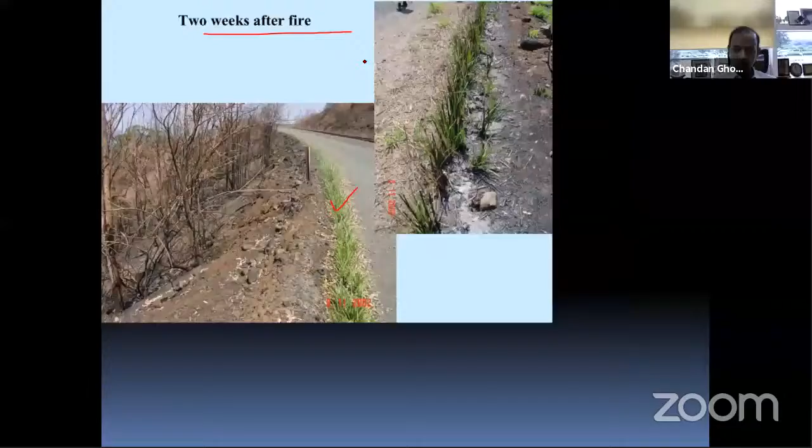And then they started growing, after a week, after 2 weeks. After 2 weeks, it has got the greenery. What a wonderful nature's gift, that when it is burning everything, the roots that you have seen, they survive. Of course the heat cannot go below.

So they start again, they survive not on any water that you have to sprinkle. The root has got enough moisture, and they have got many other qualities. They start growing and greening.

So when our fire officers or forest buffer guidelines that we have been looking for were given in the British era, and right now also we do not have any definition, we must relook into nature's gift that is available in the country itself.

So we can make our lakes and other things green also. This is the grass root that also cleans the sludge here in the toilet, in the village area, that when it goes through these roots, the groundwater gets clean. The leachate is being consumed through the root, and they survive on this through phyto remediation.

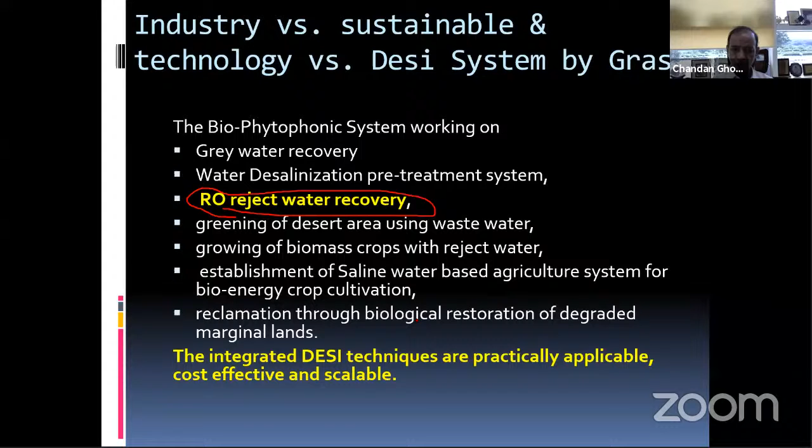So there are many other things. RO reject water also can be treated by this root. There are many other applications: wastewater treatment in industries, chemical industrial sewerage, number of examples are there, and service water processing also can be done.

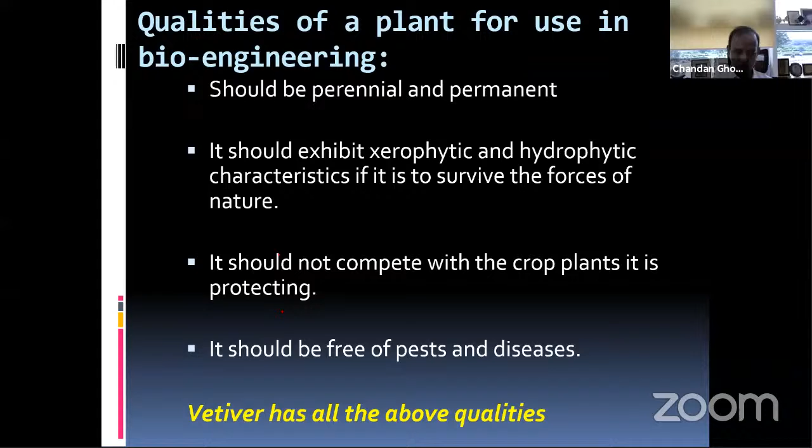So whatever has all this quality, it is perennial and permanent, and it should exhibit xerophytic and hydrophytic characteristics, and it should be free from pest. There is no pest attack on this.

Traditional medicine also uses this, and we use it in desert coolers. These days we have got many other substitutes for that. Now geotextiles are being used, and dried roots for scenting clothes is also being used.

And in this industrial waste, I'll go quickly: industrial waste you can see which is being impounded here by vetiver grass. And it is of course not in our country, this example is from another country.

Guangzhou in China, in 1985, vetiver grass was planted over here, and you see how green they become, because leachates come here and are taken up by this root while growing. When you check the leachate coming over here, it is completely free from toxic ingredients.

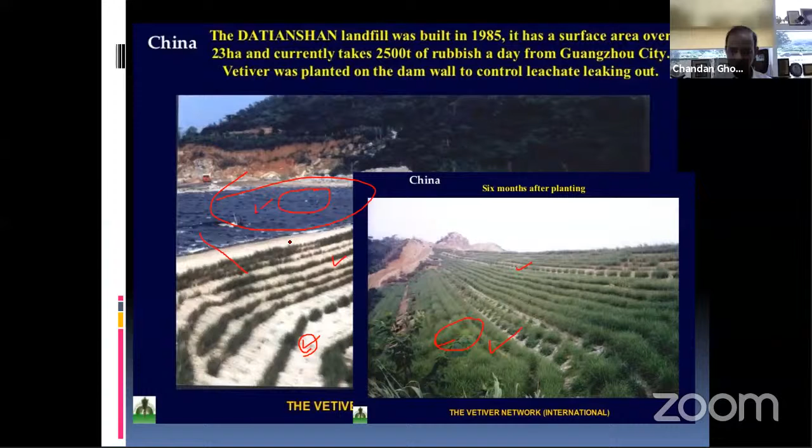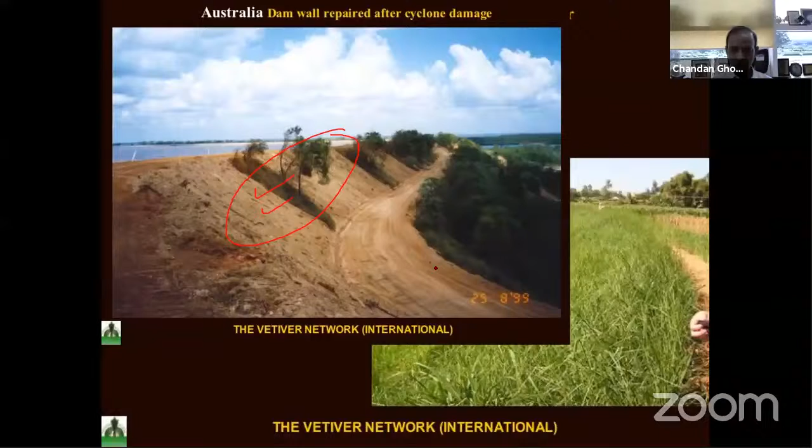So industrial effluent and this kind of thing also can be treated, or where we make embankments, even our roads, they can be made just like this, no concrete riprap or anything, simply by the grass.

It is a lifetime solution that is being achieved, in the hill area, if you want to live with the hill and the kind of landslides we are creating by making 2-laning, 3-laning, 4-laning, and we cannot all afford to have tunnels and other things. Even those need a lot of maintenance.

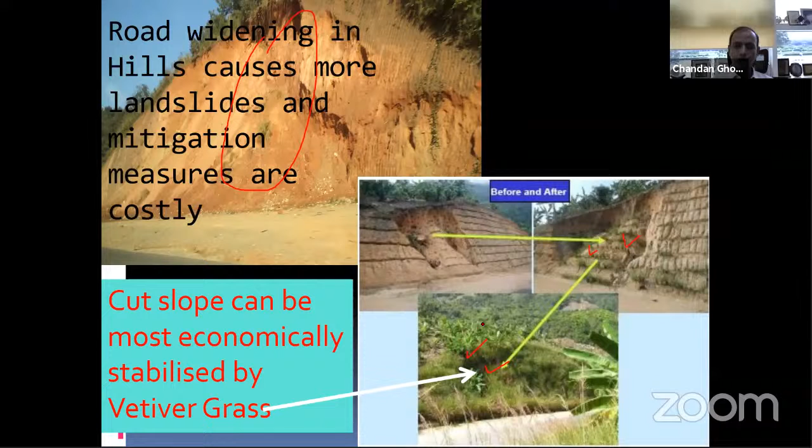But simply by placing the vetiver grass over here, they can ensure stability. This is not only one example; there are millions of examples that have redefined our way of living with landslides in the hill area. Like this one in Guwahati, you see without a landslide how it is happening.

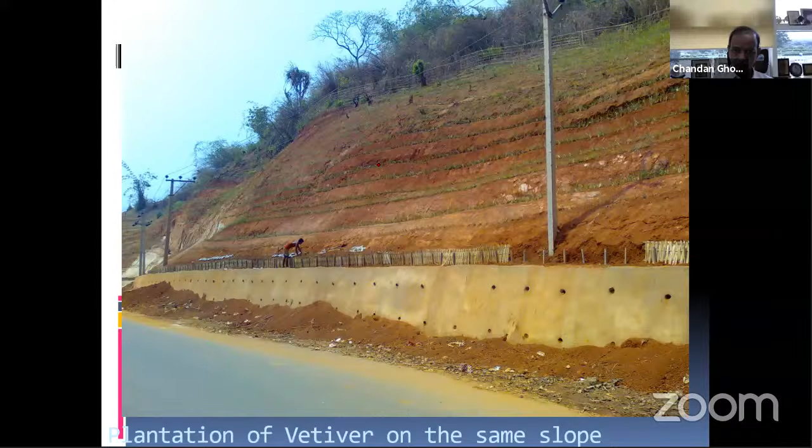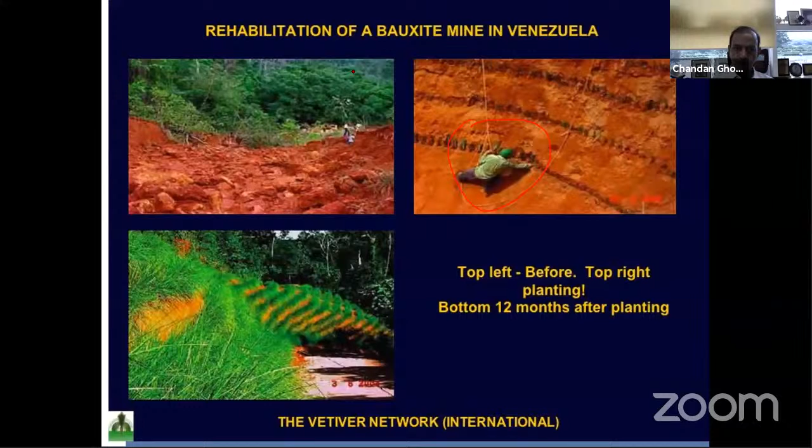And then with vetiver grass, in a few months of time, see how they have grown over here. You see the before and after. And also, any kind of soil they can grow in. Just a dressing has been made and vetiver has grown.

So we can even store water using this flexible membrane. I would like to say we can store water, because another problem is having drinking water in the hilly area. So we can use the geomembrane here, which civil engineers are familiar with.

This is a third wonder material that our industry has ever created after cement and steel. The geomembrane is being used, whether it is this chair or anything, or a computer outside box, and everything made of geosynthetics or polymer or byproducts. And they are being used as a membrane.

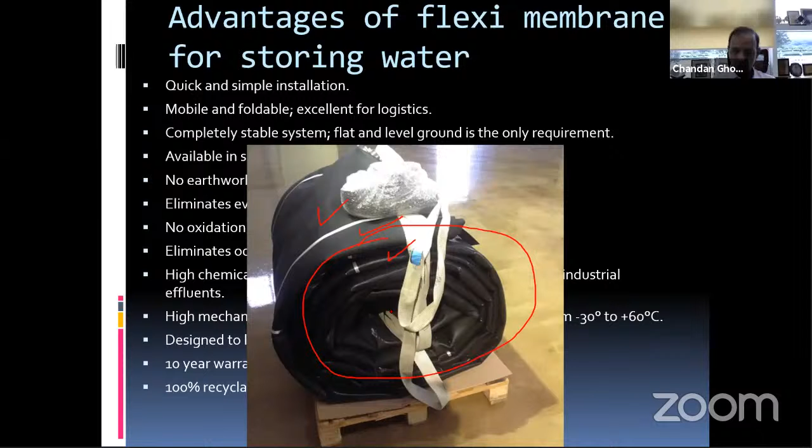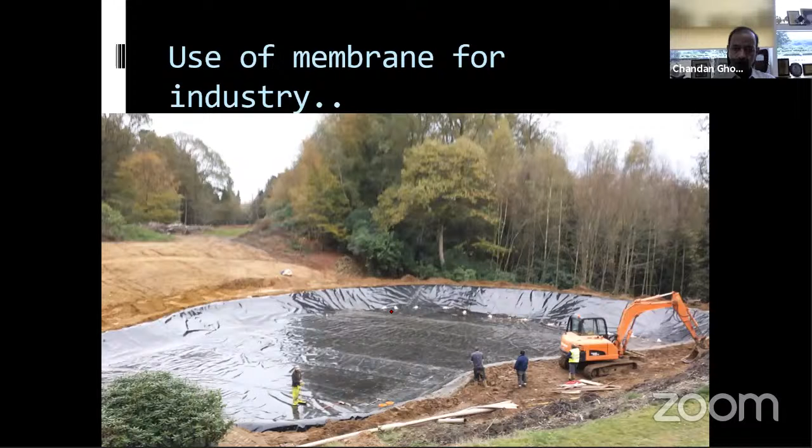We are now using these things as a substitute for even storing water instead of a dam, because dams have become controversial. We cannot have dams anymore because of environmental and many other issues. But these are used as a substitute to store water in hilly areas, hilly terrain. So even in hilly areas, we can store water in this manner, or this way also. These are some applications of geomembrane or ponds that we can make.

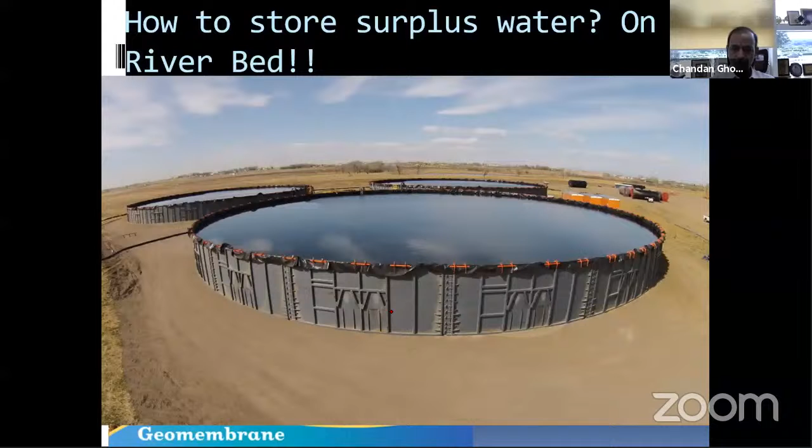There are many such applications in hilly areas that can help us live happily. If water is there, landslides can be tamed, and life can be easier. Or even canal lining, something like this can be done. So I would like to end here.

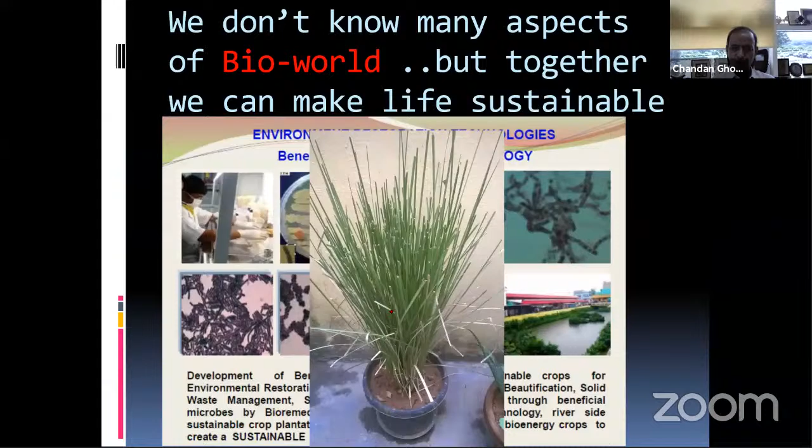This is being grown in my home. And there are many other applications of geosynthetic products to stop water from entering into our own area. So these are all geosynthetics, different products that can stop water entering and can soak up water.

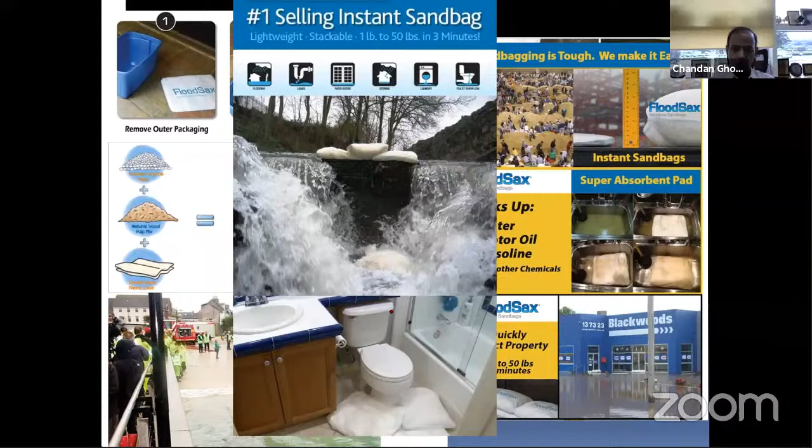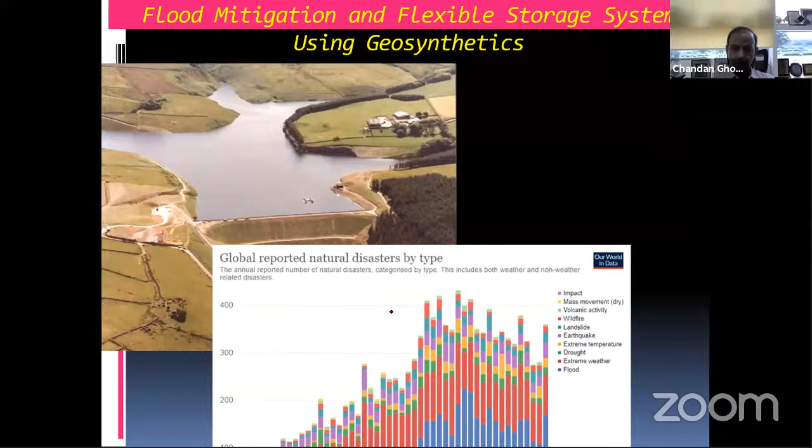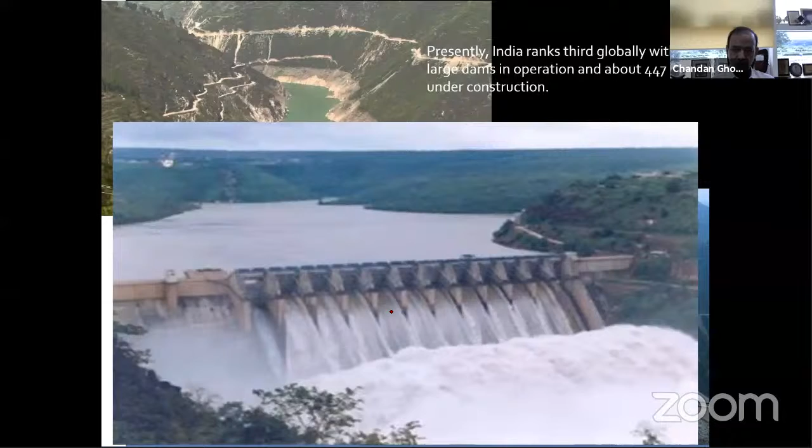If we live like here in Shillong, or in Aizawl, or other such areas, then we cannot make our hills truly resilient without addressing storage. As I said, or like the Tehri Dam that we are building, we need to find some substitute, because we can no longer make dams now.

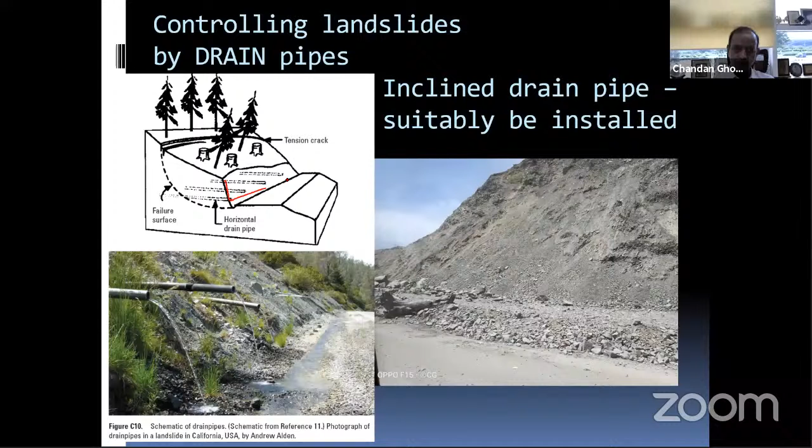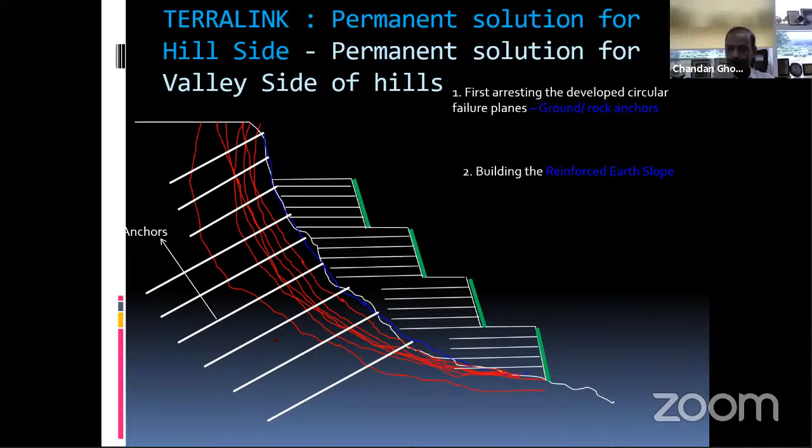Even stemming hills like this with horizontal inclined pipelines, as shown here, can make our hills safer from landslides. Otherwise, if we go for such kind of treatment, yes, it needs a heavy amount of investment. This is, you can say, hill surgery.

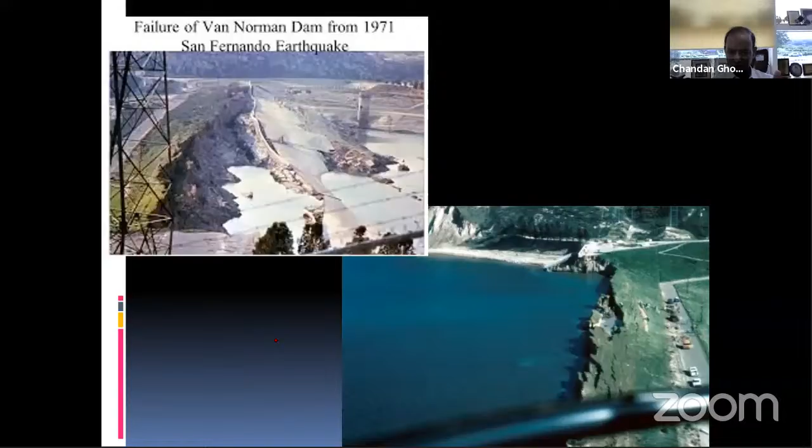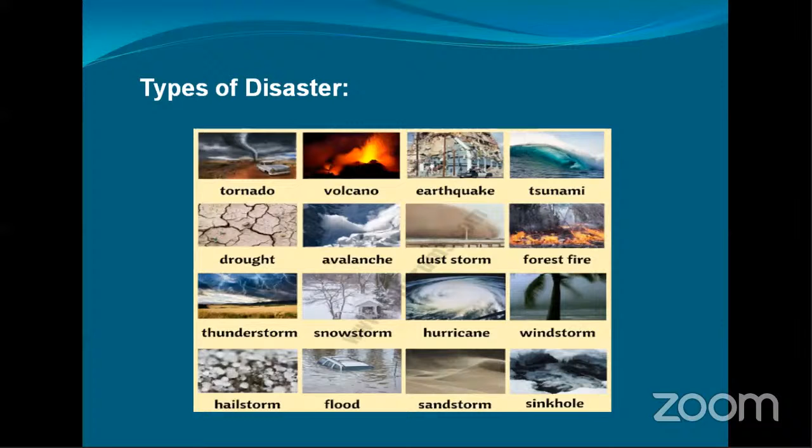Earlier, these events used to occur very rarely. But as the climate is changing, the frequency of these events has accelerated a lot.

So this slide is about climate change and disaster. I would like to give a brief linkage between climate change and disaster.

We all are aware of the Intergovernmental Panel on Climate Change. Recently, they gave their sixth assessment report, in which they warned us that the target of 1.5 degrees centigrade rise in temperature, which was to be completed by the end of the 21st century, will now be occurring by 2040, which is an alarming situation. If we talk about our ambitions, we are planning and setting goals that we will be reducing our emissions.

We will be monitoring our carbon emissions and all environmental aspects. But ultimately, the results of all the planning we are doing are not being implemented properly. Hence, this IPCC report is really heart-wrenching, because if it happens, there will be a global disaster in terms of heat waves, forest fires, floods, melting of glaciers, or anything like that.

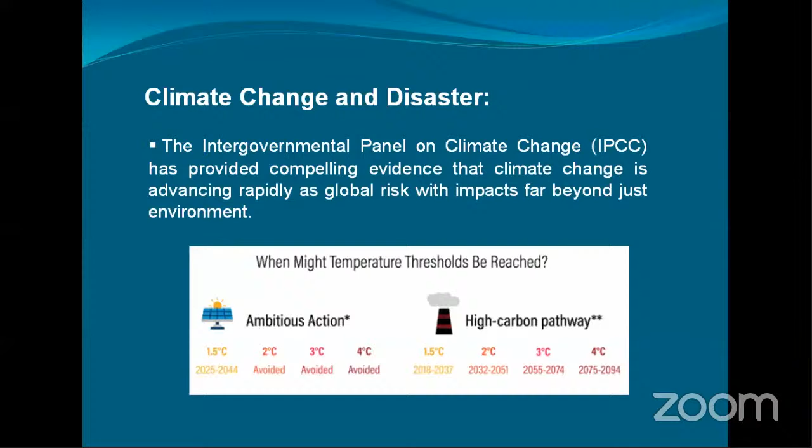With the rise in temperature of the planet, the world is witnessing more frequent disasters of greater magnitude. If I recall my childhood, I would rarely hear about any disaster like simply heavy rainfall and such things. But as we are growing, we can easily witness that the magnitude of these disasters has increased with enormous speed.

Recently, these are all disasters that you can see on the screen that occurred in 2020 and 2021. The first image is of the forest fire that occurred in Australia. It was a massive coverage, and we lost a lot of habitat, animals, and other things.

The second image is the cyclone that hit the coastal region of West Bengal, the Amphan cyclone. Recently, 2 or 3 days before that, the Gulab cyclone hit Orissa. So the magnitude is increasing. It's not that an event occurs today and then the return period gets delayed. The return period has reduced and the magnitude has increased profusely.

The third image is the Assam flood that occurred in 2020. It caused a lot of devastation in that area. Many people had to dislocate themselves, shift to other places, and lost their source of income, their houses, and everything.

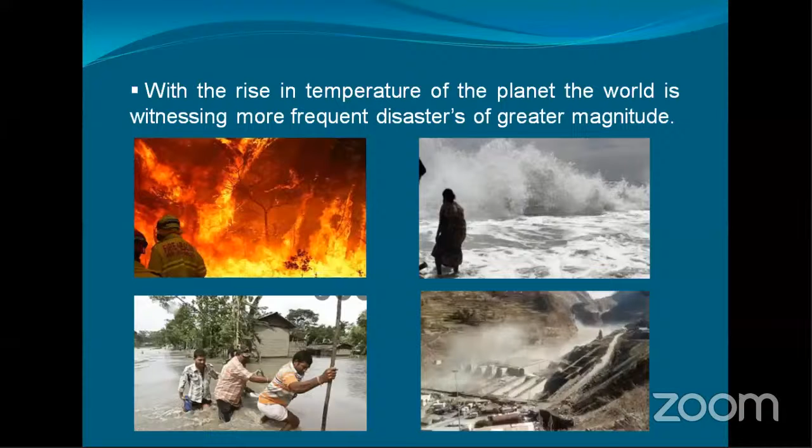So if we talk about disaster, it is not just for a limited purpose. It happens and the effects are very prolonged. It keeps on passing and passing. The lifestyle gets disturbed, everything gets disturbed, and if we talk about a community, it gets disturbed.

So what are the causes of climate change? There are various causes, and if we classify them, they can be classified into anthropogenic causes, which are man-made, and natural causes, which occur naturally.

If we talk about anthropogenic causes, these are emission of greenhouse gases—one of the main contributors to climate change. Coal mining, blasting operations, and mining operations also trigger climate change. Deforestation is another cause of climate change, along with burning of fossil fuels, which liberates greenhouse gases, depletion of natural resources, and industrial processes.

Many industries use fuels, and the burning of fuels in their processes leads to emissions that cause climate change. Agricultural activities like use of fertilizers, pesticides, and tilling action are also anthropogenic sources that cause climate change.

If we look at the natural causes, these are very limited: volcanic eruption, earth orbital changes, solar variation. Mother Nature has some natural causes that could affect the climate, but at the same time there is a concept called the assimilation capacity of the environment, which means the environment knows how to deal with all the pollutants it emits. The environment has the tendency to heal itself.

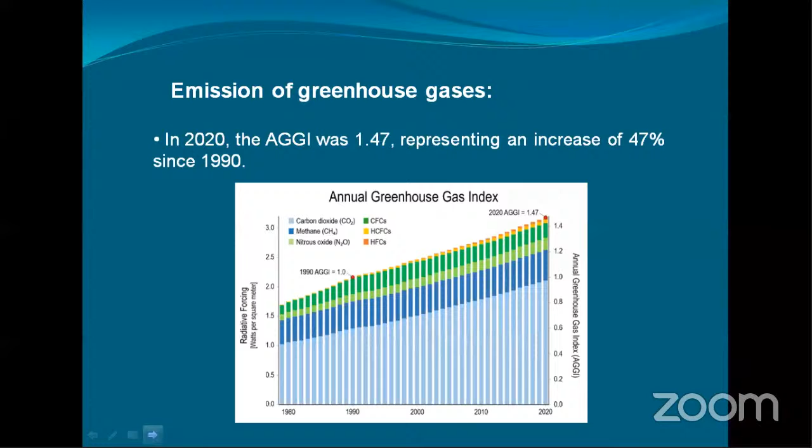So the second thing is deforestation. First we looked at the emission of greenhouse gases - this is something we are doing, producing more and more of them. Another thing we are doing in parallel is reducing the sources of carbon sequestration. At one place we are emitting carbon, and on the other hand we are eliminating the sources of carbon sequestration that could have counteracted the emissions.

But what is happening is we are profusely cutting trees, and as a result the carbon concentration is increasing, because the forest area is the major sector which absorbs carbon from the atmosphere. All the trees take in carbon dioxide, they store the carbon, and this carbon is further converted into the fossil fuels that we have been using for years.

Even recently we had an incident at Buxwaha Forest, MP - you might have heard about it. 2.15 lakh trees were ordered to be cut down only for the extraction of diamonds. So this is something where we are ourselves harming our environment.

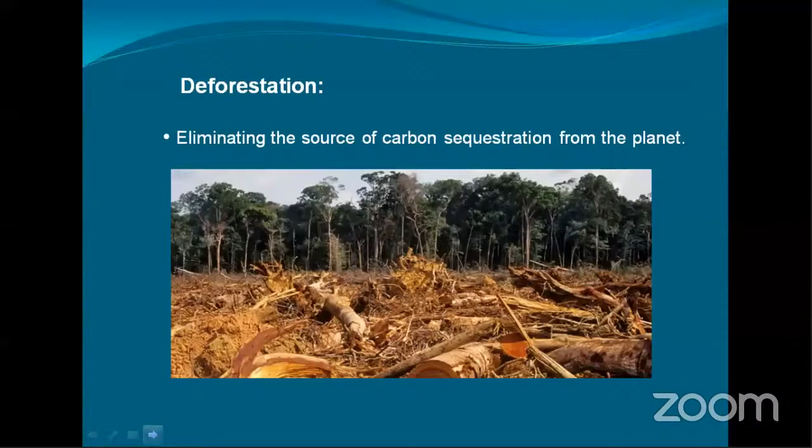We cannot restrict our carbon emissions since India is a developing country, or many countries that are developing countries are not able to restrict their carbon emissions. On the other hand, simultaneously, we are reducing all the sources that could potentially support our carbon sequestration, which is not sustainable. So one thing before coming to the main topic of green building - there is one term called carbon footprint.

Every activity that we do regularly contributes to some carbon emissions. This term originated from ecological footprint, which means the number of earths that would be required to meet the needs of human beings if resources continue to be used in the same pattern. Later on it was shifted to carbon footprint, which is an assessment of greenhouse gas emissions in terms of carbon dioxide equivalent - it is a tool for energy and environment management.

So if we want to work on climate change, or if we want to really contribute to reducing the effects of greenhouse gases, we should beforehand reduce the carbon footprint at the individual level.

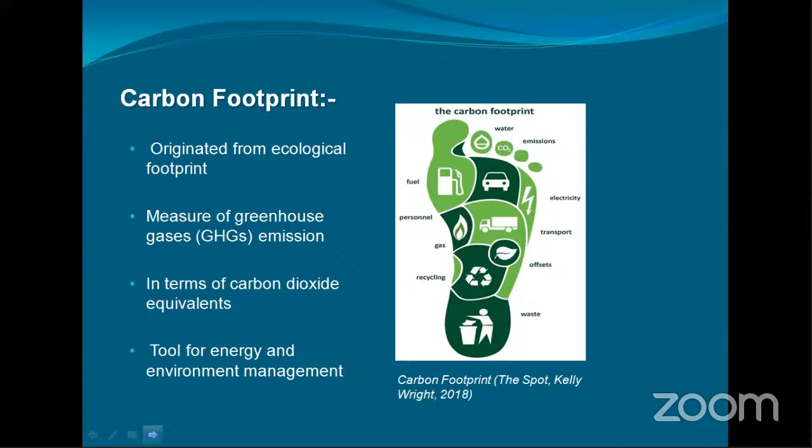So now coming to the main topic, green building. Green building is somewhere related to carbon footprint - these are buildings that would potentially reduce your carbon footprint. And if I talk about the origin of the concept of green building, I don't think it is something...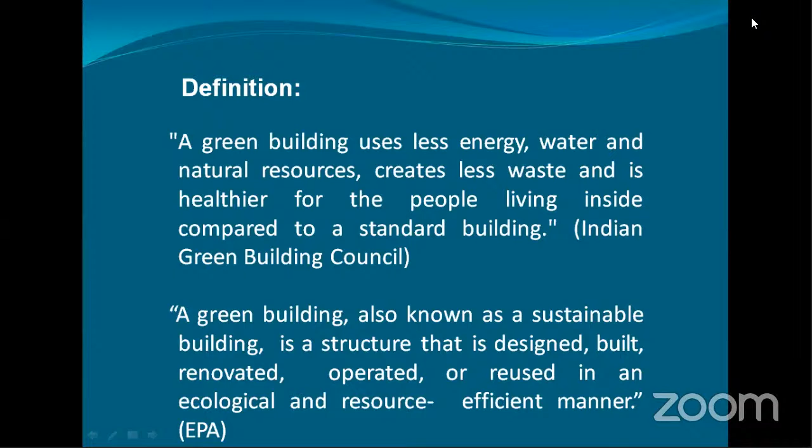So what are the objectives of green building? First is using energy, water, and other resources more efficiently. Everything we do from the planning phase to the finishing phase, along with the time of utilization, we need to ensure we are using minimum energy, wasting minimum water, and using other resources efficiently.

Protecting occupant health is another objective, because the occupants are the main consumers who will be using this building, and nothing should be used in the building that has an adverse effect on occupant health.

Third is incorporating design, construction, operation, and maintenance practices that significantly reduce or eliminate the negative impacts of development on environment and occupants. This is somewhat similar to the above thing, that we need to reduce the negative impact. It is not just about making an efficient process while on the other hand harming our environment by cutting trees profusely just to provide a better atmosphere. That cannot be sustainable development.

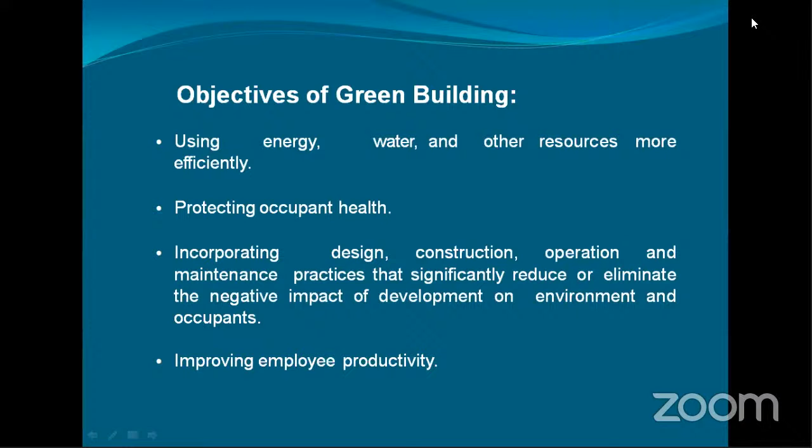And last is improving employee productivity. One of the main agendas behind green building is providing an atmosphere in which the employee feels more friendly, and the productivity will automatically increase.

Next, it addresses energy efficiencies, greenhouse gas emissions abatement, water conservation, waste avoidance, reuse and recycling, pollution prevention, enhanced biodiversity, reduced natural resource consumption, and a productive and healthier environment.

One major thing I was talking about is reducing the carbon footprint. If a building is able to reduce the carbon footprint, then our goal of adopting green building is definitely a good solution. This type of building should make sure it is reducing greenhouse gas emissions that contribute to carbon footprint, as well as conserving other resources like water and wood.

Next, green buildings can be homes, offices, schools, hospitals, and other buildings. Some people think it is only possible for commercial buildings, but no, it is not like that. It can be homes - our personal home can be a green building. It can be an office, school, hospital, or any building constructed by a civil engineer.

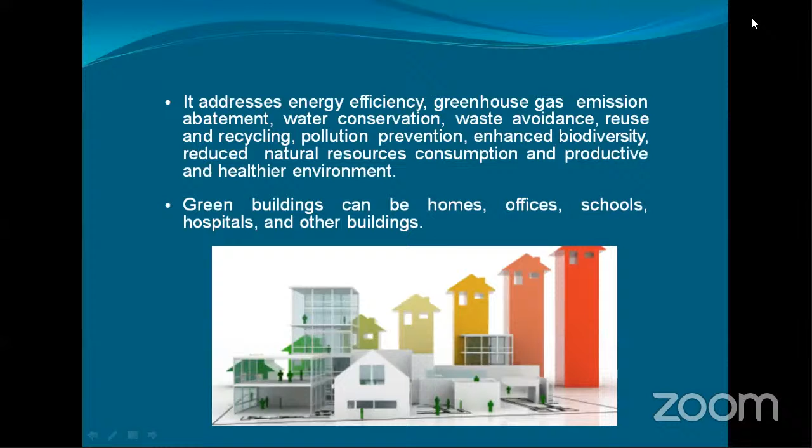So these are all the objectives of green building. Now, why do we actually require green building? All these points I'm listing here are from the GRIHA report, which I will be talking about later.

The first point is that the construction sector poses a major challenge to the environment. As we all know, construction contributes to the overall development of a country, but at the same time it poses challenges to the environment. As the pace of construction rises, the environment deteriorates day by day.

Globally, buildings are responsible for at least 40% of energy use, and even throughout their span they use around 40% of energy, ultimately increasing the carbon footprint. Next, an estimated 42% of global water consumption, since conventional structures require a lot of water during construction and during the period of serviceability.

Next, 50% of global consumption of raw material is consumed by buildings when taking into account the manufacture, construction, and operation period. So total raw material, the resources, 50% of global consumption comes from the construction sector. In addition, building activities contribute an estimated 50% of the world's air pollution.

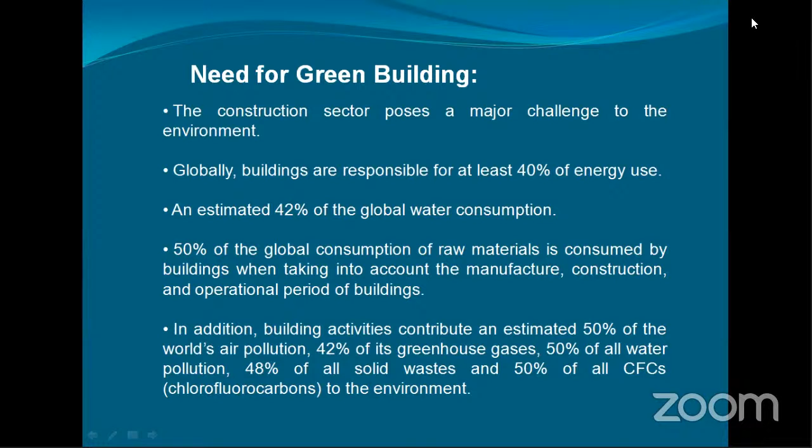This is again one big issue: 42% of greenhouse gases causing global warming, 50% of all water pollution while fresh water is already very limited and we are further polluting it, 48% of solid waste, and 50% of all CFCs, chlorofluorocarbons, released to the environment. These are the things that push us to shift our construction methodology and adopt a green building system.

So some of the salient features of green building are the consideration of sustainability aspects in all phases of building design and planning.

One thing every civil engineer and person should do is ensure that from the planning phase, the day we start planning till the execution and completion of a project, every work we do is sustainable in nature.

Second is the use of healthy and environmentally friendly building materials and products. All materials used in a building have to be environmentally friendly. For example, the emulsions used for painting houses emit large amounts of VOCs, which are unhealthy for individuals at home as well as for the natural habitat. Similarly, concrete emits large amounts of heat, so we need to ensure healthy practices are adopted in the construction of green buildings.

Use of efficient systems: since we are reducing our carbon footprint, we need an efficient system that reduces emissions of carbon and reduces wastage.

Next is the use of construction and systems which are easy to maintain. Maintenance is important because it's not enough to invest a lot in a green building; over time, we may keep investing again and again in maintenance of the structure. So we need to keep in mind that it has to be environmentally friendly, along with ensuring the maintenance of the building is very easy.

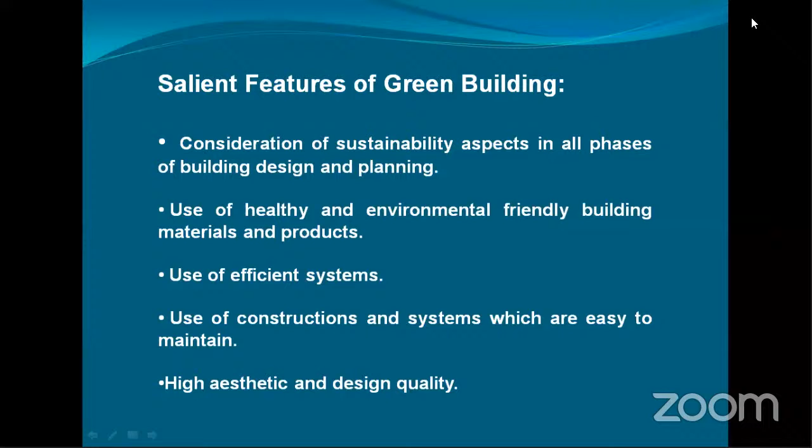Last is high aesthetics and design quality. We cannot compromise on aesthetics. Aesthetics is one of the major factors for today's generation—a building should be aesthetically pleasing, it should look good, and it should fulfill the desire of the person who wants to be part of or work inside that building. Aesthetics plays a psychological role, and green buildings ensure that aesthetics are not compromised.

These are some of the design considerations. So while designing a green building, there are a few points to keep in mind. The first is the orientation relative to the sun's path—it is essential to ensure that throughout the day we get natural sunlight.

Next is the ventilation aspect. We should ensure cross ventilation is maintained in the building. Windows are provided so that wind from the northeast and southwest can easily pass through the building, reducing the temperature and purifying the air through dissipation or dispersion of pollutants.

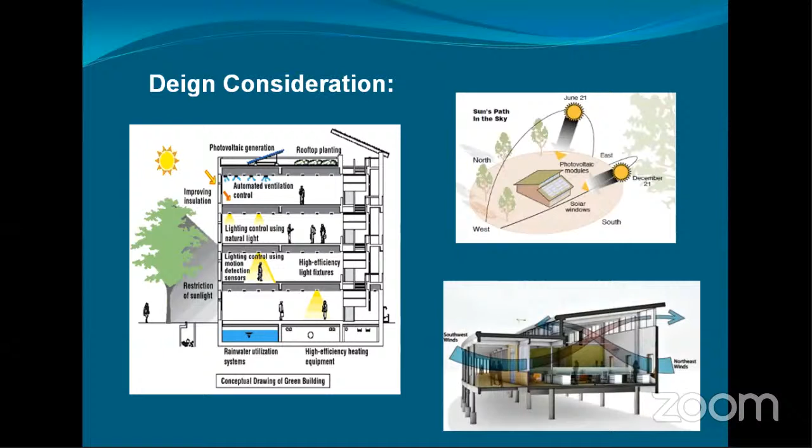A rainwater utilization system should also be provided in the building, which I will discuss later. And rooftop plantation—plantation decreases the temperature, so rooftop plantation is a very common practice adopted in green buildings. It reduces temperature, is a good source of carbon sequestration, and provides aesthetic beauty to the building.

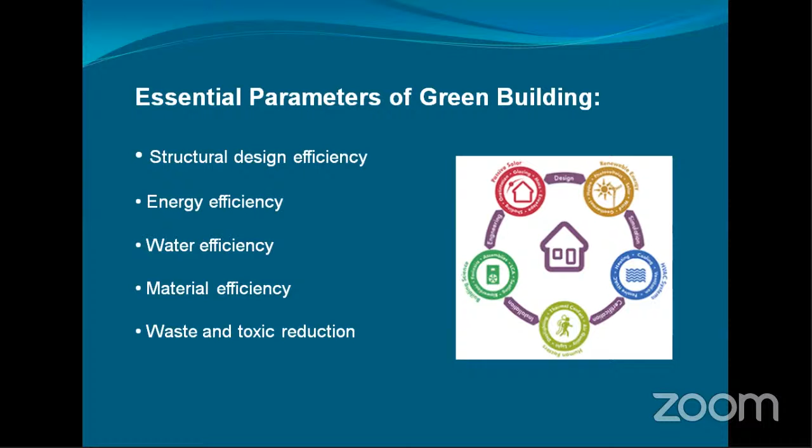Now coming to the essential parameters of green building: first is structural design efficiency, next is energy efficiency, water efficiency, material efficiency, and waste and toxic reduction. These are the parameters around which the concept of green building lies.

First is structural efficiency. Its main intention is to minimize the total environmental impact associated with all life cycles. So when we talk about structural efficiency, all the materials—for example, if you use more concrete in a building—then it will not be a viable solution.

So in this type of building, we prefer more of AAC bricks, that helps in reducing the temperature and all these aspects. Use of lumbers and timbers available can be preferred. Bamboo and all these things can be preferred.

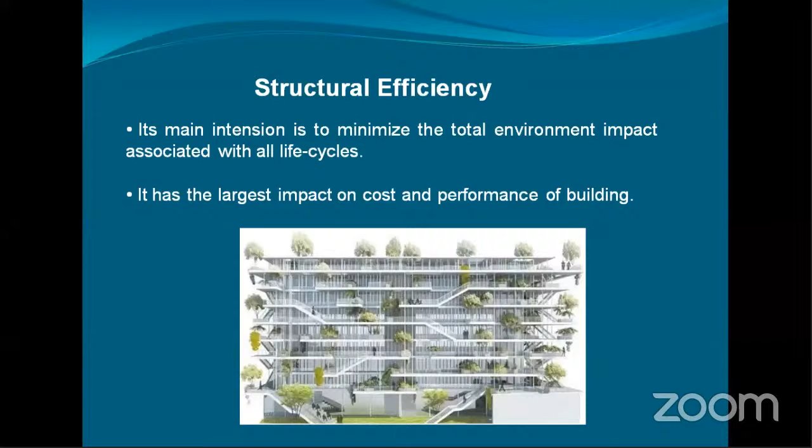It has the largest impact on cost and performance of building. Cost of the building is highly dependent on the structural efficiency. If the structural efficiency is not proper, the cost of building will automatically be a problem in due course of service.

Next is energy efficiency. To maintain and increase energy efficiency, we need to reduce the operating energy use, reduce dependency on conventional sources of energy, and empower the use of renewable sources like solar power, wind turbines and all.

That has a minimum impact on the environment, as well as the cost incurred is also decreased, ensuring maximum natural light inside the building. For this, orientation of sun is kept in mind. Frequent windows are provided so that natural light is present inside the building throughout the day, and we are least dependent on other energy sources during the daytime.

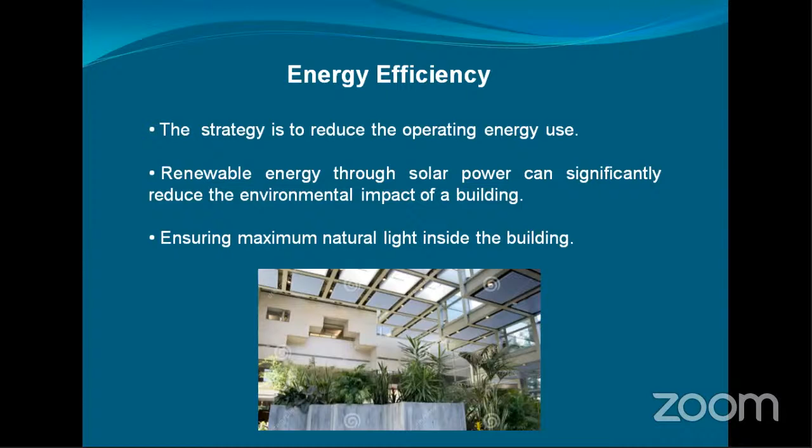Only the air circulation, or conditioning system, is required to run during summers. Rest, it requires minimum energy during the daytime.

For water efficiency, reducing water consumption and protecting water quality is the key objective. In this type of building, we need to ensure that fresh water especially is not wasted.

What we'll be doing is employing some water treatment plant systems, harvesting our natural water. Along with that, we'll be using our grey water for irrigation purpose or for flushing of toilets.

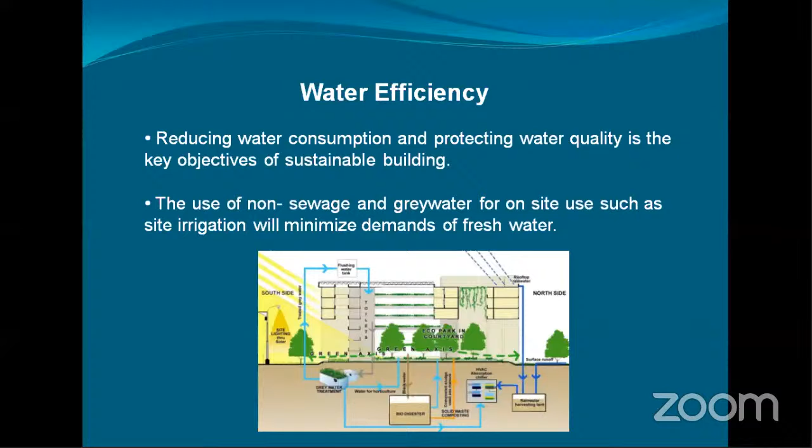Majority of grey water will not be discarded directly. It will be used and later on sent to the wastewater treatment plant. So conservation of rainwater is one important thing we have to do in green building. Secondly, we need to make sure that dependency on fresh water should be as minimum as possible.

Next is material efficiency. As discussed earlier, materials are very essential for a building to be eco-friendly. If it is emitting heat and all these things, then it is not sustainable, it is not good.

In these type of cases, the majority of use is from bamboo. Bamboo is something that can be grown easily, it grows very rapidly, so dependency on bamboo is very much. It also provides a medium for air ventilation since it is hollow from inside, and helps as an insulating member.

Apart from that, we try to reduce all those materials that can possess any type of risk to the environment or the occupant. We try to make sure that we are using the most recycled materials, so the material efficiency will be increased.

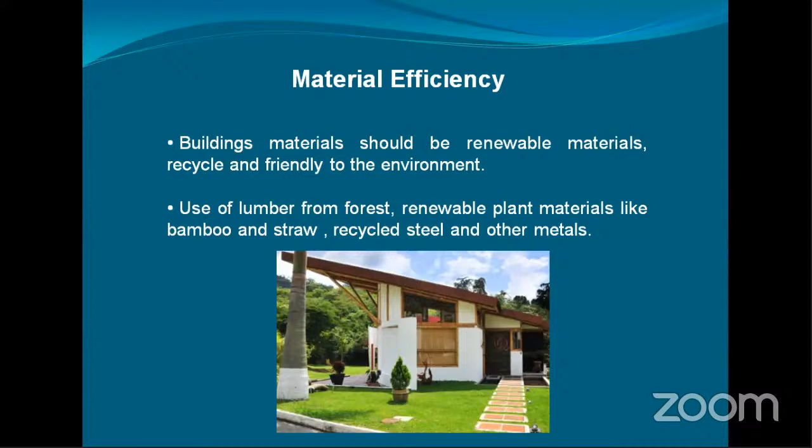Next is waste and toxic reduction. This is also again one important parameter. The objective is to minimize the generation of waste and ensure the 3 R's, that is reduce, reuse and recycle of waste management. Any waste generated in the campus should ensure these 3 R's are actively followed.

Apart from that, use of toxic material like VOC emitting paint - most of the emulsion paint we use in our daily houses emits lots of VOCs, which is very harmful for individuals' health as well as environment. So the paint we'll be using will be something that restricts the emission of VOCs into the atmosphere.

Employing treatment systems - there are many treatment systems like waste management system. For example, solid waste can be managed inside the campus itself, along with wastewater treatment. All these type of treatment systems have to be employed in the green building so that we minimize the generation of waste and ensure the best effective solution within the campus itself.

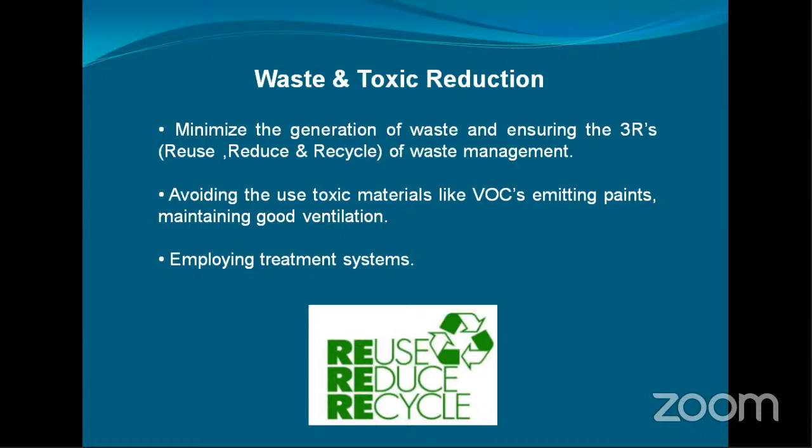Now, this is the green building of ONGC Dehradun. This is the construction phase of this building. The construction phase is quite similar to our conventional buildings, but the planning is very different.

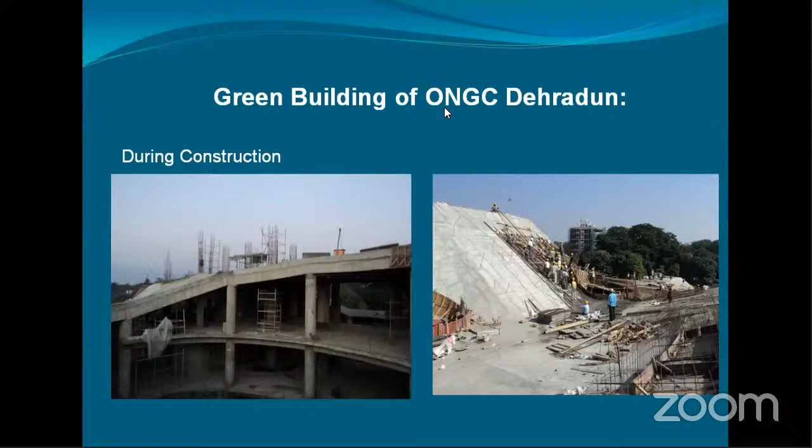This is the post-construction phase of this ONGC building at Dehradun. If you look at it, it is full of light during the daytime, with some windows on the roof. This first image shows the green building from outside, covered with green plantation throughout the roof. Proper waterproofing is done so that water should not penetrate inside the building, and air vents are provided throughout the building to maintain proper ventilation.

Light windows allow proper lighting during the daytime, as seen clearly in this image, so there is minimum requirement of artificial lighting inside the campus during the day. However, at night time, the energy harvested by the solar panels is used inside the campus. If you look at the third image, this is during the night time, so all the lighting you see is artificial, but powered by solar batteries, reducing dependency on electricity from government sources.

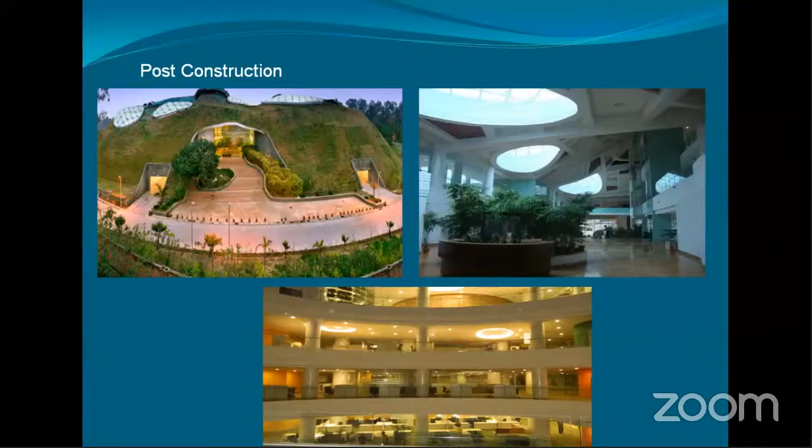If we talk about conventional building versus green building, in terms of aesthetic consideration or how it looks from outside, both of them look the same and are alike in manner. Externally, a green building will have more plantation, which can definitely be done near a conventional building also. Second is building use - as per utility, both buildings are used for the same purposes. A green building can be used as an office, and so can a conventional building. So where does the difference lie?

The difference lies in conservation of natural resources. In green building, it is ensured that natural resources are conserved, whereas in conventional building we are not working more on reducing the use of natural resources. The second difference is concern for human comfort and indoor environment - the quality of air inside, the comfortableness of indoor quality is better in green building than conventional building. And operating savings - if we are investing a lot of money in green building, we need to ensure that in the long term it provides some sort of savings.

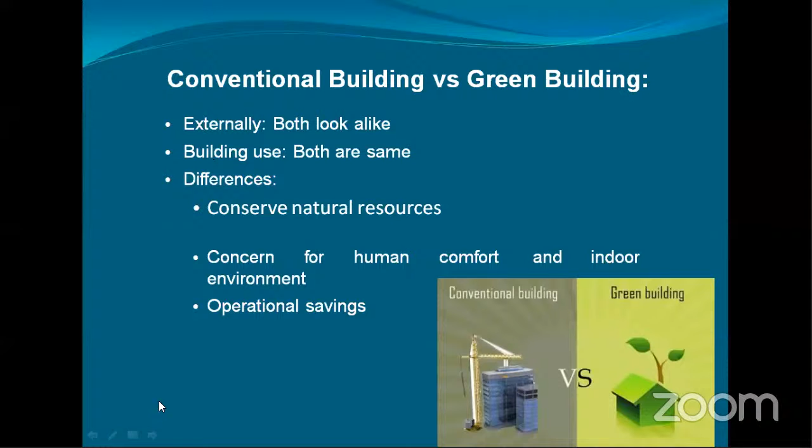Now, green building rating systems in India. There are two commonly adopted rating systems. First is Green Rating for Integrated Habitat Assessment, given by TERI, The Energy and Resource Institute, known as GRIHA. Second is Leadership in Energy and Environmental Design, LEED, given by IGBC. These are the two rating agencies that audit green buildings and provide certification and grading to green buildings in our country.

Energy efficiency - what kind of efficiency the building is providing. Water efficiency - reduction in use of fresh water and eliminating generation of wastewater. Then material selection - what material is used in the building, is it recycled or fresh, and so on. Last is indoor air quality. These are the 5 basic parameters on which both rating systems assess a building and provide suitable gradation.

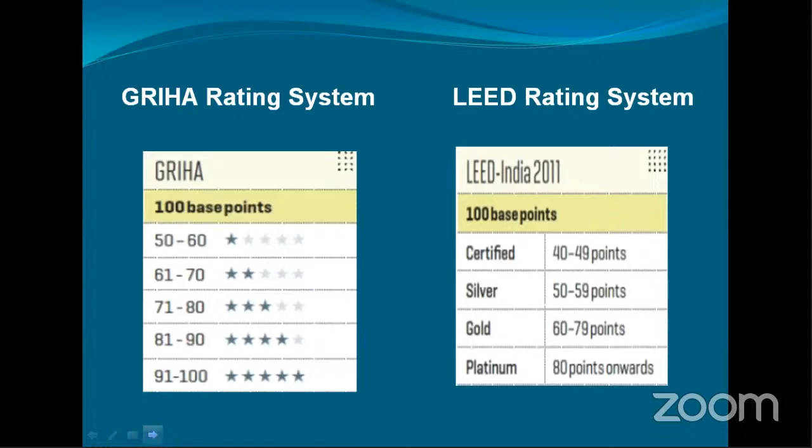If we talk about existing green buildings in India, there are several, but I will go through only 2 or 3. First is Suzlon One Earth, in Pune, rated platinum by LEED. It is 100% powered by on-site and off-site renewable resources, so it uses its own energy and is not dependent on any other source - generating and harvesting energy from renewable sources and utilizing it in the working of the structure.

It has 18 wind turbines in the campus that fulfill 7% of the energy demand. So inside the campus itself they have wind turbines, and along with that, off-site they have their own set of turbine plants which fulfill the remaining energy demand of this building.

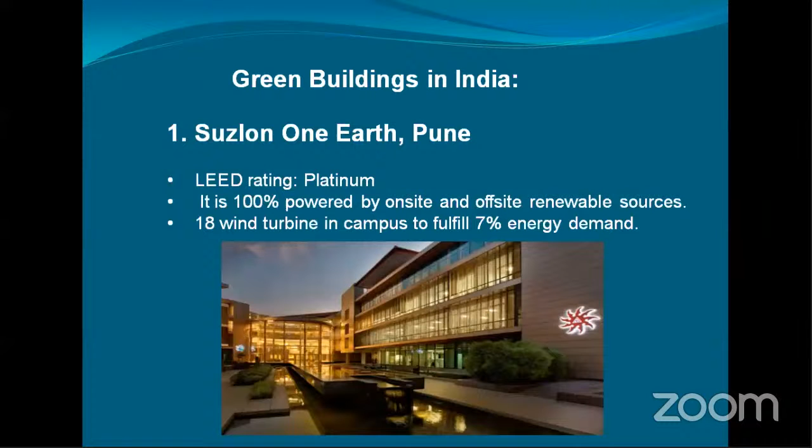Second is Rajiv Gandhi International Airport. My main motive in showing this is that green buildings are not restricted to only commercial buildings - this is an airport located in Hyderabad. Within the campus of the airport, there is a green belt of 273 hectares with numerous plants. Establishment of this green belt helps in reducing carbon footprints and provides more fresh air, and phytoremediation plantation is also adopted to improve the air quality of the surroundings. It has been successful in saving energy of nearly 3.97 billion kilowatts and has reduced the carbon footprint by 3,331 tons. This data is fairly old.

So in today's actual scenario, the carbon footprint that they have reduced will be much, much more, and it has been rated silver by the rating. So this is another building.

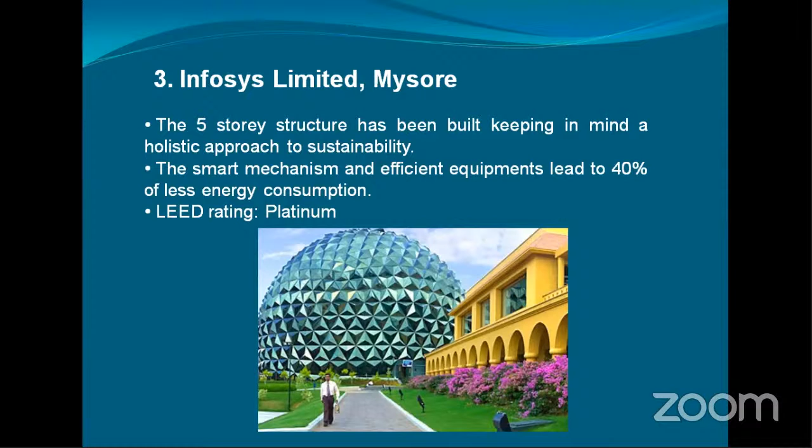So what are the benefits of adopting green building? There are some tangible benefits. If we talk about operational savings, the green building consumes at least 30 to 50% less energy and 20 to 30% less water than a conventional building. If we compare both buildings, this one is entering very less energy, utilizing very less energy, and also reducing wastewater generation.

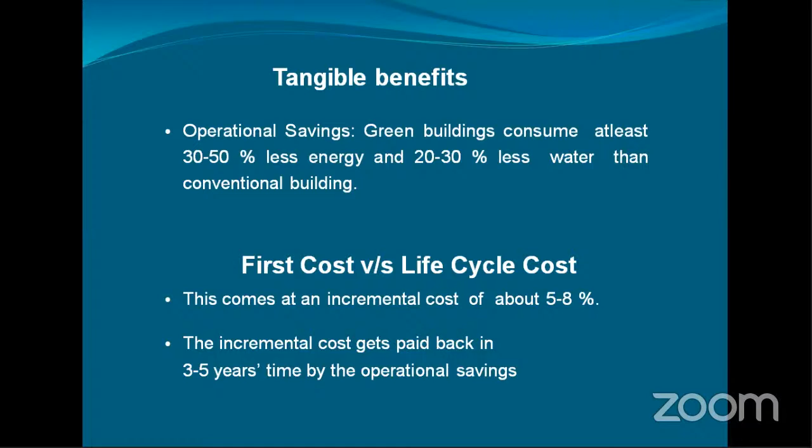If we do cost benefit analysis, this comes at an incremental cost of about 5 to 8% more than the conventional building. For sure, the initial investment is slightly higher, but the incremental cost gets paid back in 3 to 5 years by the operational savings. Although the initial cost is high, over the period of service it is providing, the extra incurred cost of 5 to 8% is easily recovered in 3 to 5 years. After that, you are simply enjoying the benefits of green building, paying less cost for energy consumption, and your contribution to the environment is phenomenal.

1,75,000, 1,70,000, and 20,000 respectively. If these buildings were built as per conventional methodology, it would have been consuming around 48 lakh kilowatts of energy, 35 lakhs, and 3,50,000 kilowatts of energy. But since being green buildings, now they are consuming around 31 lakh, which is a reduction of 40%, similarly 20 lakh, a reduction of 45%, and 1 lakh 30,000, a reduction of 63%.

So the annual saving, if you look, is huge - 102 lakhs, more than a crore, 90 lakh, and 9 lakh. Over a period of time, these buildings prove to be extremely beneficial. If we are ready to take the initial cost, after some time we will easily be able to recover all the investment we made early, and we will be lowering our expenses on electricity and so on.

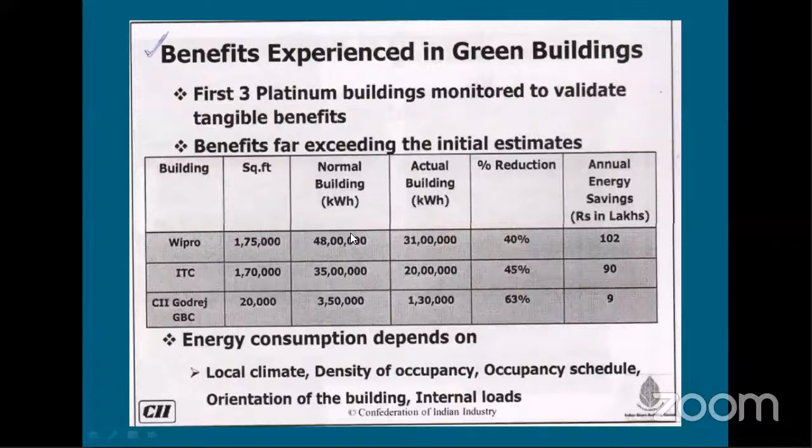There are some intangible benefits such as enhanced air quality - for sure the air quality increases, the pollution level decreases - and excellent daylighting. You will be using natural daylight instead of artificial light throughout the day, and during night time you will be using artificial lighting, that too from a renewable energy source like solar and wind turbine.

Next is improved health, well-being, and productivity of the occupants. If you are breathing fresh air, your health will remain good and the productivity of your work will definitely increase. Conservation of scarce natural resources means they will not be overexploited, and you will be using them properly to ensure sustainable development. Reduced impact on environment - all the adverse impact associated with conventional buildings is eliminated in green buildings, or reduced to a significant level.

Last is enhanced marketability for the project. For sure, if you have a green building in and around your city, it is of great significance, so the market value of that building automatically increases.

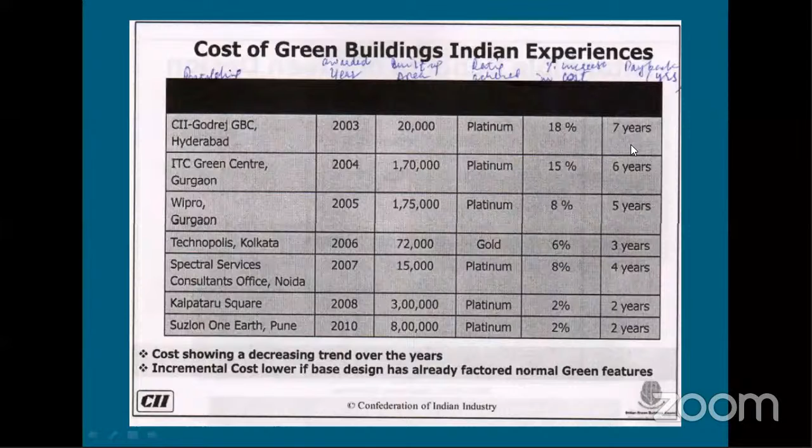So these are all the different buildings and their cost benefit analysis. 7 years, 6 years, these are all the payback years - one day your building will definitely pay you back.

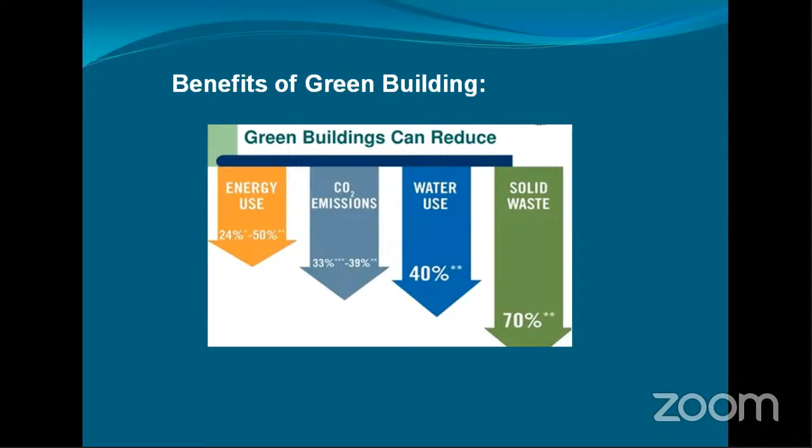So if you summarize, what are the benefits of green buildings? Lower energy consumption, lower CO2 emission. Definitely, we are contributing less carbon footprint. We are using less fresh water, and we are generating less solid waste. And all these things are managed within the building itself. Even the waste that is generated is being managed. The waste water is managed, and all these things are managed within the building itself.

So if I would like to draw a conclusion: green building reduces the carbon footprint, which results in the reduction of greenhouse gas emissions and concentration in the atmosphere. So green buildings will reduce your carbon footprint, which will ultimately result in the reduction of greenhouse gases, which is a reason for disasters in our world.

Next, green building helps in reducing the stress on natural resources and contributes to sustainable development. So all the natural resources are not stressed anymore. You will not be over-exploiting them. They will be there for years, and the next generation will also be able to witness all the natural resources that are existing today.

Green building provides significant return on investment over a period of time. As we looked upon the cost benefit analysis, over a period of time, the building will definitely pay you back.

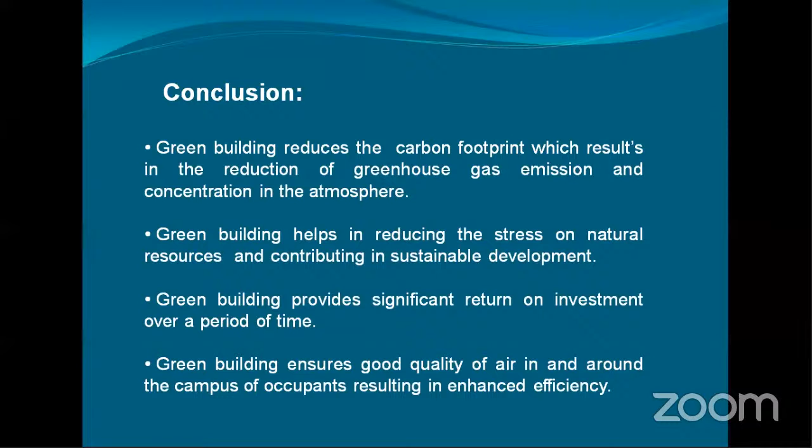And the last point is green building ensures good quality of air in and around the campus for occupants, resulting in enhanced efficiency. So one thing that we all need to keep in mind is that we need to keep ourselves healthy as human beings, because only after we maintain our health will we be able to work for the environment. So if you're working inside a green building, your health will definitely be good. It will never be deteriorated.

So thank you. This is all from my side for today.

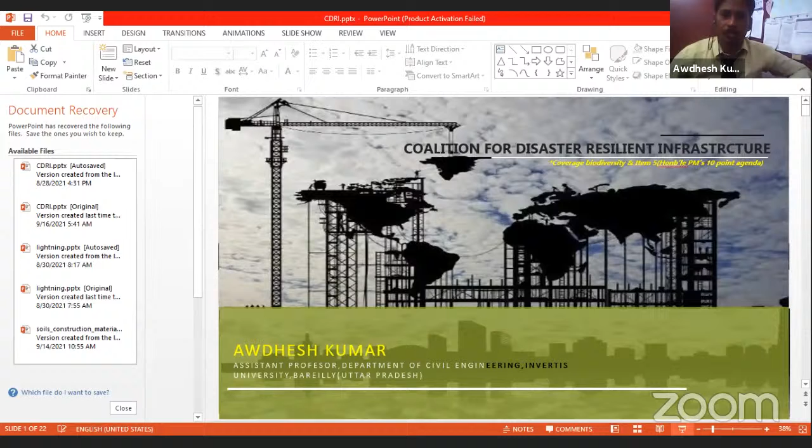So here you can see, if Michael sir, if it is visible in full screen mode.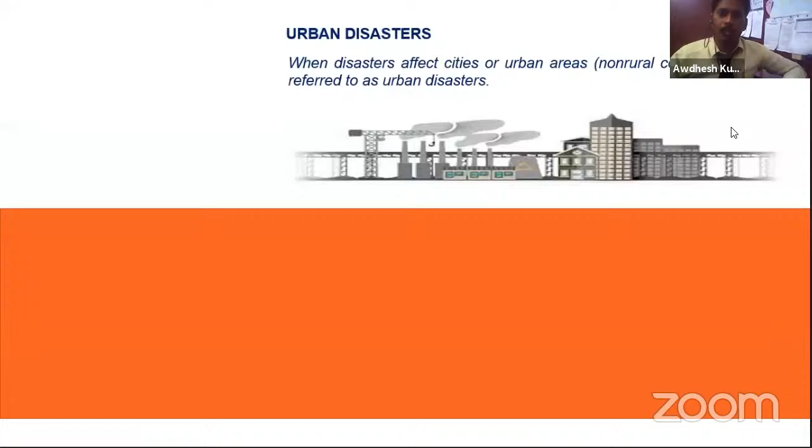Now, if we go ahead, urban disaster - as urbanization is a global phenomenon, many people are moving toward urban cities and urban populations because they get better employability opportunities there, and the standard of living is good. So because of these reasons, urbanization is a global phenomenon.

With this movement or migration, or we can say urbanization tendency, we have also observed an increase in urban disasters. So when disasters affect cities or urban areas, they are referred to as urban disasters.

For that, I recently explained this Prime Minister's 10-point agenda which has 10 items, and this is included in the National Disaster Management Authority guidelines, November 2019. You can go through this - NDMP 2019, Chapter 1, Preliminaries 1.6. This is the item in which the Prime Minister's 10-point agenda is given high importance. Now moving toward CDRI.

So how did CDRI originate, how did disaster resilient infrastructure become the need of everyone? At the G20 session, the Prime Minister of India spoke about quality infrastructure investment and development cooperation. He said that disaster resilient infrastructure is required not only for development, but is also necessary to combat natural calamities. In this regard, he stressed upon the need for an international coalition at the G20 conference in Buenos Aires.

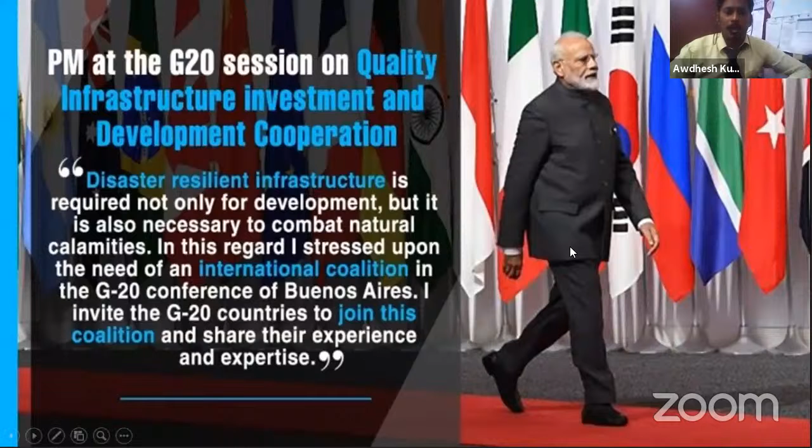This means a holistic approach is followed in achieving the disaster resilient infrastructure goals and aims. These aims are to promote disaster resilient infrastructure at the global level, not just the national one - it is not the issue of India, or Asia alone, it is the issue of everyone. Its objective is to promote research and knowledge sharing in the field of infrastructure risk management, standards, financing, and recovery mechanisms.

For example, Ankit sir in his lecture was discussing the rating system that is made for designating green buildings. So if a building achieves a certain score in a rating system, we designate it platinum. Or if a building gets some other lower score, we designate it gold. So platinum, gold, silver - these are the ratings.

But have you seen anywhere that disaster resilient infrastructure has any rating? I think this is a gap on which CDRI is actively working. So this rating system development and other aspects are the work of the CDRI initiative.

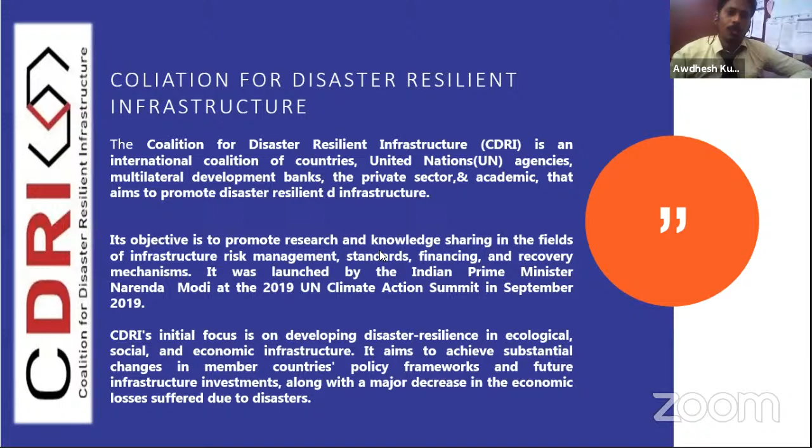Moving ahead, CDRI is a partnership of national governments, UN agencies, etc. So CDRI promotes resilient infrastructure to respond to the sustainable development goals.

We have seen a pandemic, and we have seen a situation where we have seen people dead in our localities, in our families, in our state, in our countries. And that was really a situation that threatened the globe and all the continents.

But before that, the sustainable development goals, and today SDG goal accomplishment is also a forefront challenge before the global community. Yeah, there was a setback due to the pandemic, but before that we were not in a very great position. So SDG goals need to be fulfilled, and this is important for the survival of humanity.

That's imperative to expanding universal access to basic services, enabling prosperity and decent work to everyone. We have to consider people as global citizens, not the citizen of a single country or any state. So in this way, CDRI promotes the SDGs.

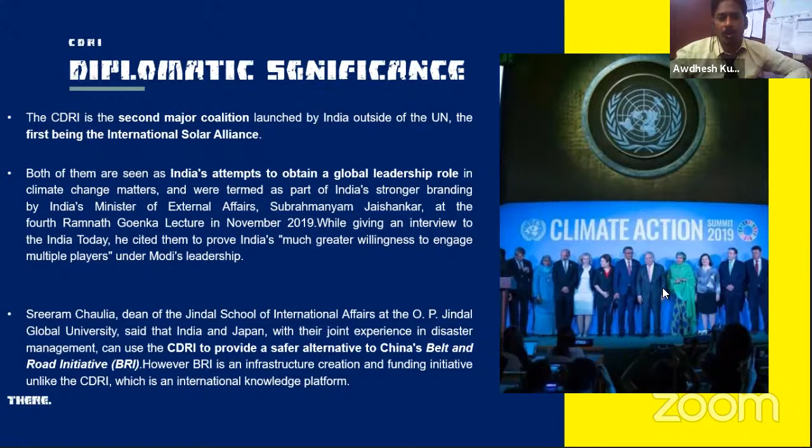Other than this, CDRI also provides a safer alternative to China's Belt and Road Initiative, BRI. However, BRI is an infrastructure creation and funding initiative, unlike CDRI, which is an international knowledge platform, but also an action platform, we can say.

So, the need for CDRI and its strategic priorities: few concrete initiatives work at the intersection of the Sendai Framework, Sustainable Development Goals, and climate change adaptation, focused on infrastructure. Now it is a systematic approach—we can see three strategic priorities of CDRI.

Number 1, technical support and capacity building. This includes disaster response and recovery support, innovation, institutional and community capacity building, and assistance with standard certification, as I discussed in the previous slide, like development of any rating system regarding that.

Second, research and knowledge management. This includes collaborative research, global flagship reports, and a global database of infrastructure and sector resilience. It is an important fact that research and knowledge management is very important in reducing risk.

Third, advocacy and partnership—you cannot do this with just two hands, you need more and more hands. This includes global events and initiatives, a marketplace of knowledge financing, implementation agencies, and dissemination of knowledge products. So these are the strategic priorities from CDRI.

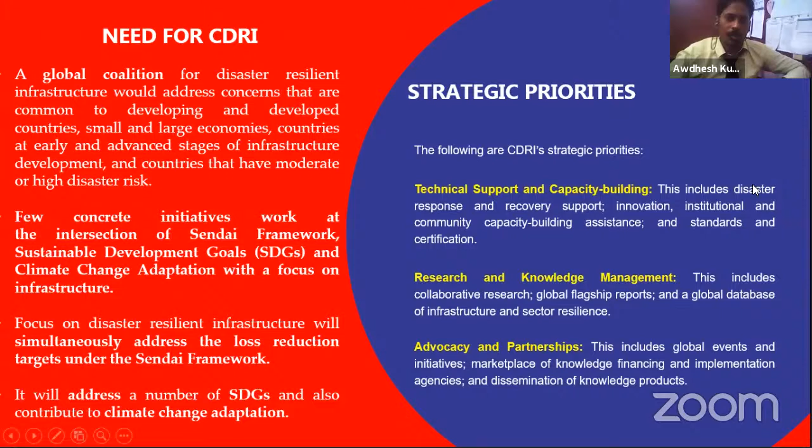Now we can see the three thematic areas on which CDRI works: governance and policy, risk identification, estimation and standard certification; capacity building, innovation and emerging technology; and recovery, reconstruction, finance, and community-based approaches. These are the thematic areas on which the Coalition for Disaster Resilient Infrastructure works.

Here we can talk about beneficiaries: economically weaker sections of society, women and children. They are called the vulnerable among the vulnerable, and that's why the impact of disaster is greater on them. So they will benefit from improvements in knowledge and practice in creating disaster-resilient infrastructure.

In India, the northeastern and Himalayan regions are prone to earthquakes, coastal regions to cyclones and tsunamis, and the central peninsular region to drought—so this initiative will benefit them as well. This is a glimpse from IWDRI 2019, where NDMA and UNISDR discussed various aspects, bringing together countries from different parts of the world to work on disaster resilient infrastructure.

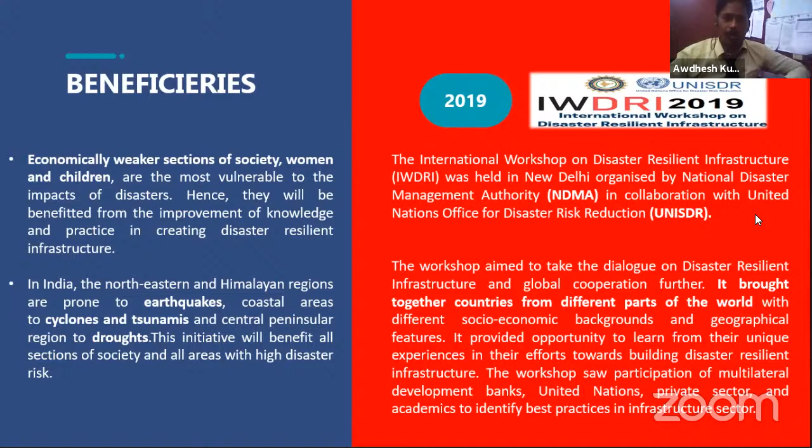These are the member countries of CDRI. Now it is updated—I think the count is 24 now. This was updated on 16 March 2021, and now it has increased to 24 or more. It's a great sign that countries are joining hands for disaster resilient infrastructure.

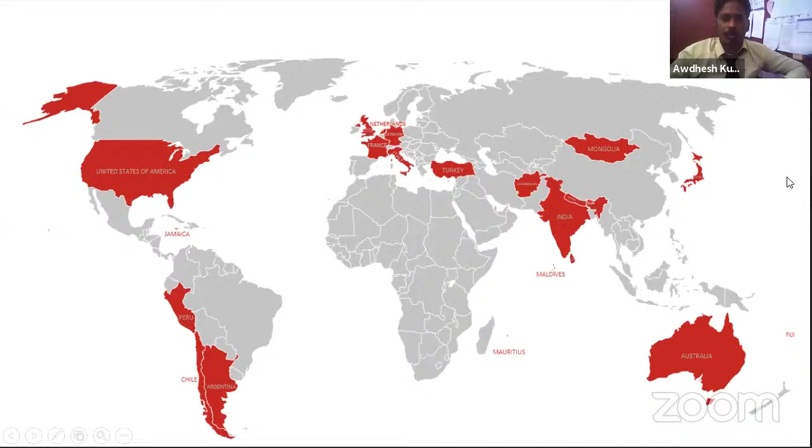Here is a presentation in an interactive way on the global map. These red countries are the member countries of CDRI.

There is another aspect - without money or financial support, it is impossible to carry forward these types of initiatives. That's why a number of, almost all, the leading

financial institutions like Asian Development Bank, World Bank, UNDP, UNDRR, ARISE, Coalition for Climate Resilience Investment, and European Unions have come forward to join hands in providing financial aid to this initiative.

CDRI programs - as we can see, this is the mandate of CDRI: to develop a range of programs in the coming years to engage institutions and individuals to promote innovation and greater resilience.

Current programs include the CDRI fellowship program, number one. This information can benefit the student community a lot, because the CDRI fellowship is an excellent opportunity for them as well. It is focused on encouraging students, practitioners, researchers, and community workers from CDRI member countries to apply ideas on how to keep infrastructure resilient to climate and disaster risk.

CDRI will award 31 one-year grants of US $10,000 each year. You can go to CDRI World for more details. This is information for community workers, researchers, practitioners, and students.

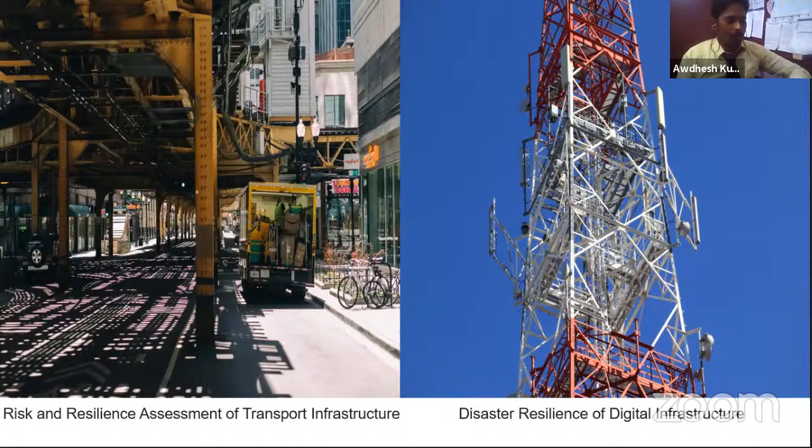if communication is not going to work, then we cannot know the situation of the particular area, and we cannot have proper communication with the outside world. So it is very difficult to conduct relief and rescue operations here.

Now, this is another technical standard for disaster and climate resilient infrastructure - risk resilience and early warning systems. Even the Prime Minister's 10-point agenda, item number 5, also focuses on

involvement of technology in disaster risk reduction. So this is also addressing that as well.

A small video I am presenting here - please see this. Is critical for people's well-being, quality of life and economic progress.

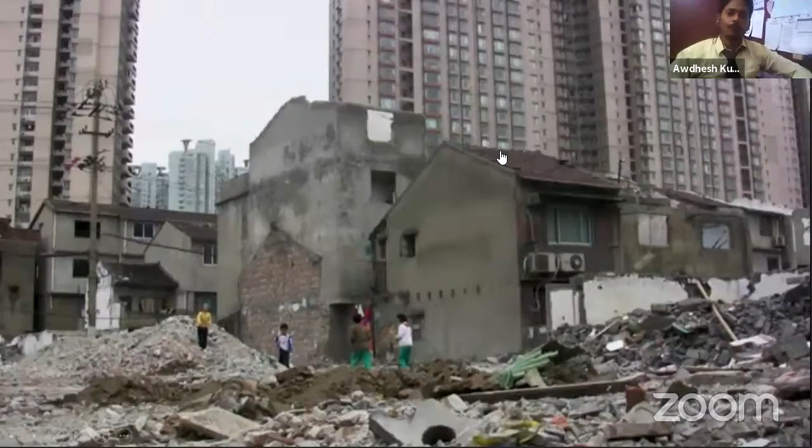Resilient infrastructure is critical for people's well-being, quality of life, and economic prospects, irrespective of where they live. Inadequate and poorly built infrastructure blocks economic and social development. Increasing exposure to earthquakes, floods, and tropical cyclones stresses infrastructure systems.

Two-thirds of total economic losses in disasters are associated with infrastructure damage. As extreme weather events become more frequent and intense due to climate change, these losses are set to rise. The impact on small island developing nations and least developed countries is particularly severe. Disaster and climate resilient infrastructure is essential to the achievement of the Sustainable Development Goals and to accelerate climate action.

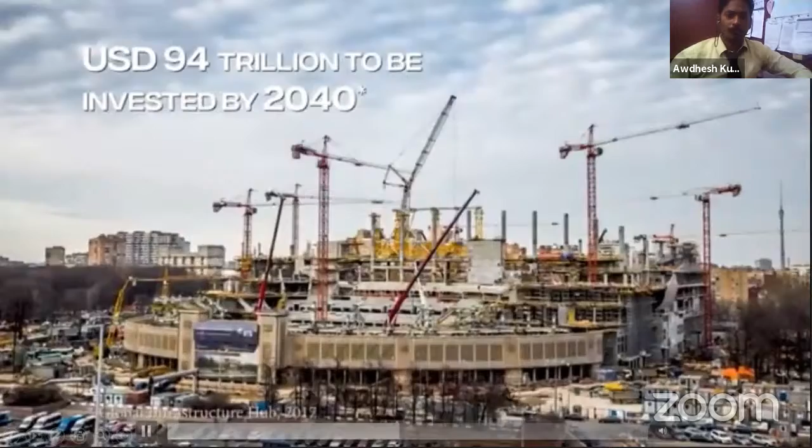$94 trillion of global investment is needed to fill the infrastructure deficit by 2040. More infrastructure will be built in the next 20 years than in the last 200 years.

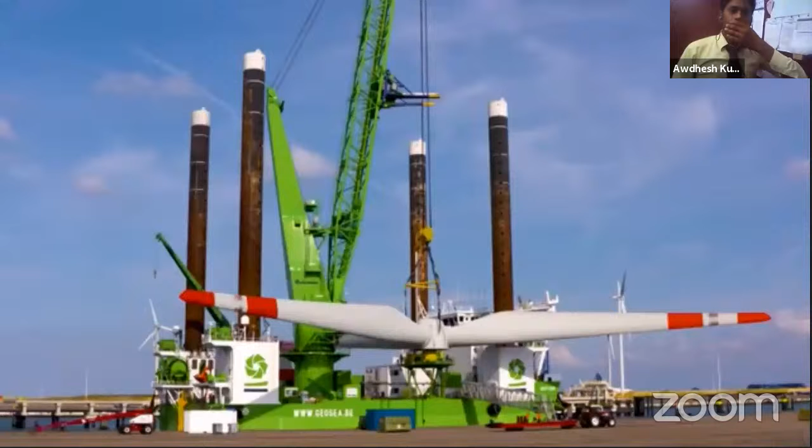Fortunately, achieving disaster and climate resilient infrastructure is not expensive. $1 invested in strengthened resilience generates $4 in avoided economic and social losses. The Coalition for Disaster Resilient Infrastructure is an international partnership that will support countries to build the disaster and climate

resilient infrastructure they need. Championed by global leaders, CDRI will provide knowledge, technical support, and capacity development to those countries with the greatest infrastructure challenges. Join us to achieve the SDGs and accelerate climate action by making all new infrastructure disaster and climate resilient.

I hope you have understood what I aim to convey, and you have seen some points and figures showing that more construction and infrastructure development will occur in the next 20 years than in the last 200 years. So obviously in the next 20 years, infrastructure is going to increase at an even higher pace, and if it is not resilient, it will result in huge losses.

So again, this was the situation. At last, this is the world where an unfortunate concept is going on: first grow, then sustain. Many countries follow this model, including especially the developed countries. We will one day realize that only when the last tree has died, the last river been poisoned, and the last fish been caught, will we realize that we cannot eat money.

This is a popular proverb from the Cree Indians. With this, we have to think about sustainability first, and then we can grow. If we adopt the reverse order of development, it will result in adverse impacts on society.

Ultimately, our aim is a welfare society, so this type of approach should not work against the welfare society. That's why we need to incorporate resilient infrastructure approaches and keep social welfare above greed.

With this, I would like to sum up my presentation. Thank you so much for your patience in listening.